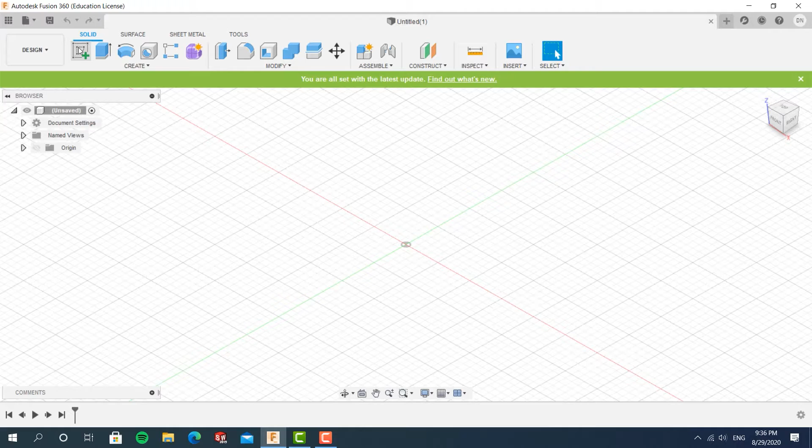Okay, so now let's get going with the tutorial part. For anything you want to CAD out, you want to first create a sketch. A sketch should be a 2D version of whatever you want to do. So let's start by creating a sketch using this tool right here, create sketch. For that, you would need to choose a plane to draw your shape on. Right now, let's choose this plane right here, which is the front plane.

When you're sketching, you have three basic types of functions. First is create. Basically, you create different shapes and things — this is the bread and butter of whatever sketching you need to do.

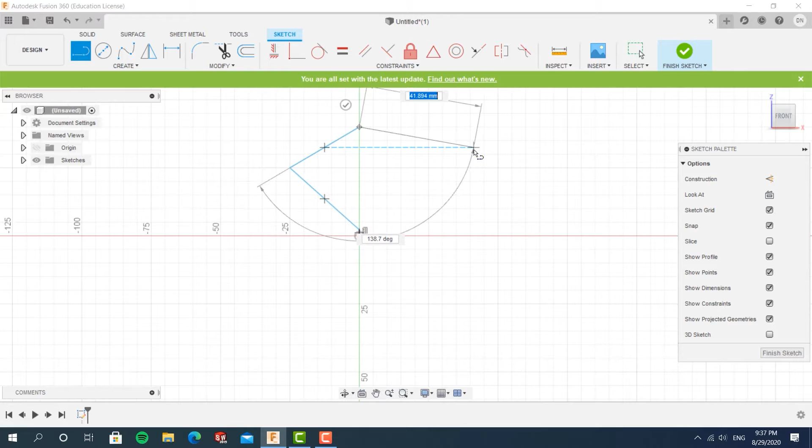You can add lines, the most basic shape. Like its name, it's just a line between two points. The first click decides where the line starts, the second click where it ends, and when you continue on, it continues from the end point of the previous line — your next click becomes the end point of the next line. If you want to exit this function, you can double click, click a point you already have on your sketch, or press escape.

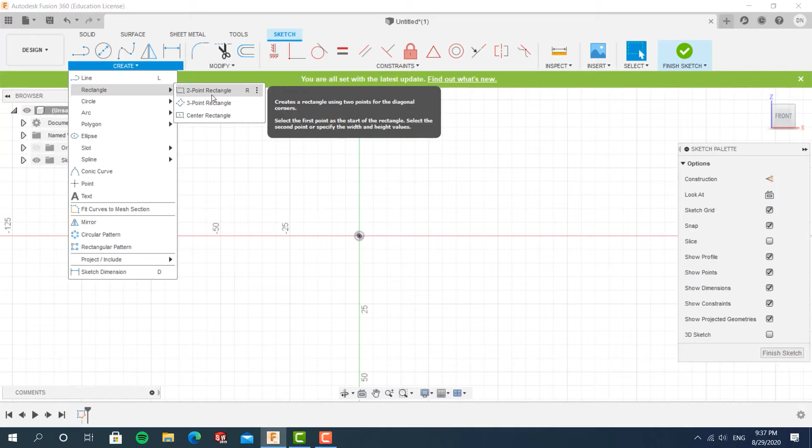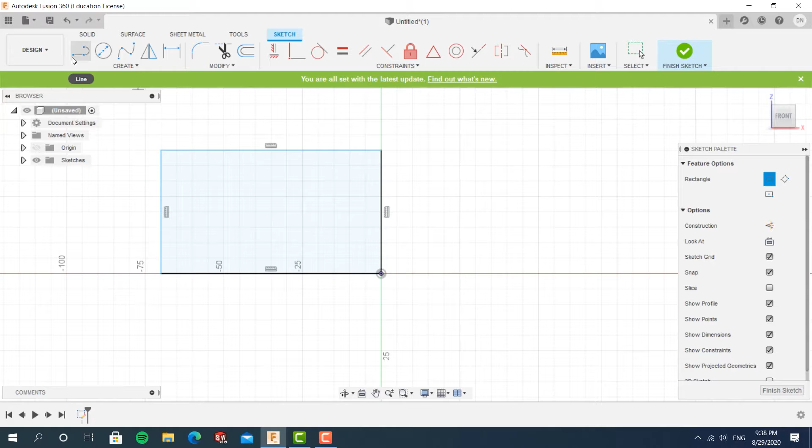Okay, so let's delete those. Other functions you have are creating rectangles — these are the different types you can use. The most simple one is the 2-point rectangle, where you create a rectangle out of 2 corners. The limitation of this one is it will mostly line up with the 2 axes. You cannot make a rectangle going this way — it's just not a thing you can do with the 2-point rectangle.

If you want to do that, you would need to use a 3-point rectangle, where you choose 3 different corners. Let's delete those and move on to the next one.

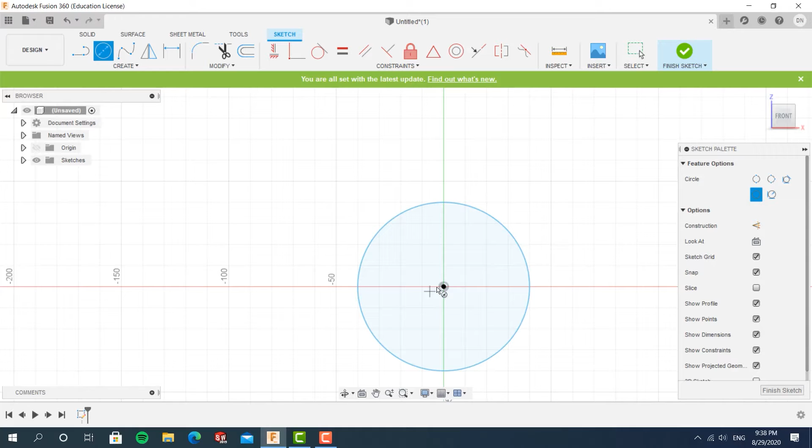The next tool is a circle. The first click is the center, the next click is one of the border points — basically you just draw the radius and it creates your circle. There are other ways to draw a circle, but that's the simplest way, and most likely you'll just use that one and add constraints later to limit it or set it where you want.

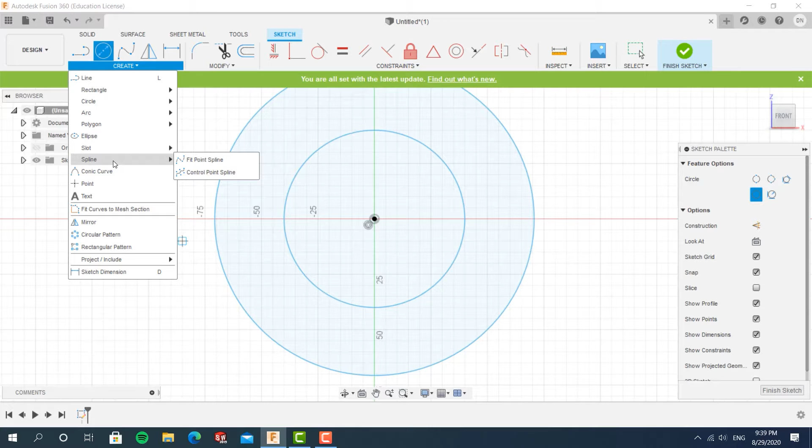You can create an arc, a polygon, slots — everything is very simple and bare bones, you read the name and basically get it. The things you most likely won't get right away are the spline and the dimension, so let's talk about those. But first, let's just delete this so we have a clear sketch.

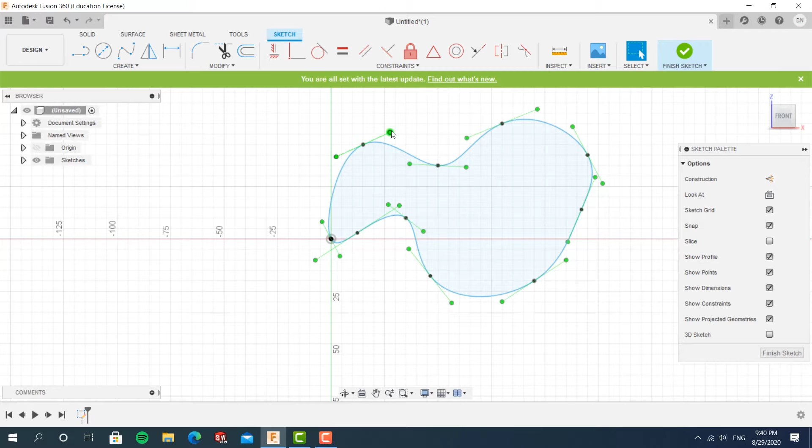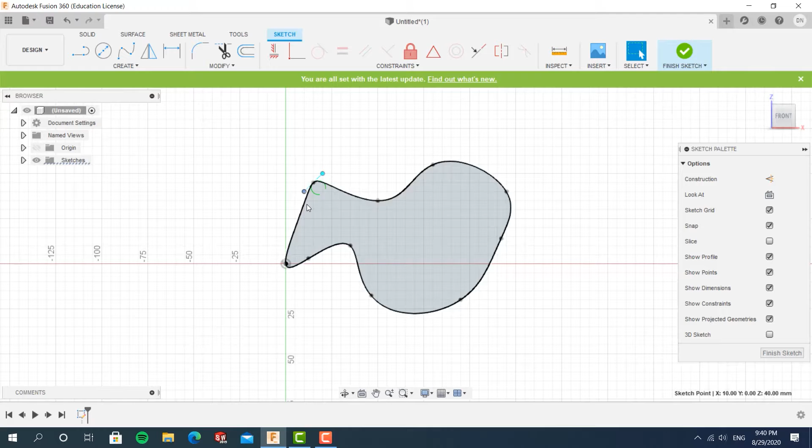A spline is basically a smooth curve that goes through all of the points you choose. Right here, it goes through all of those black points, and when you want to modify it, you can modify these green lines and points, called the spline handles. If the handle is longer, the curve follows it more closely; if shorter, it doesn't follow as much — you can modify those. This tool is very useful when you're making weird shapes, when you only have some constraints of the whole shape but you don't really know what the shape is like.

For example, if I want a smooth curve that goes through some points, I'll draw out a random shape — let's say this is a rock, and I want a smooth curve that just covers the whole rock. I can just choose all of these points, and I'll need to adjust the spline handles later on, but basically you can get a smooth curve that covers the whole thing.

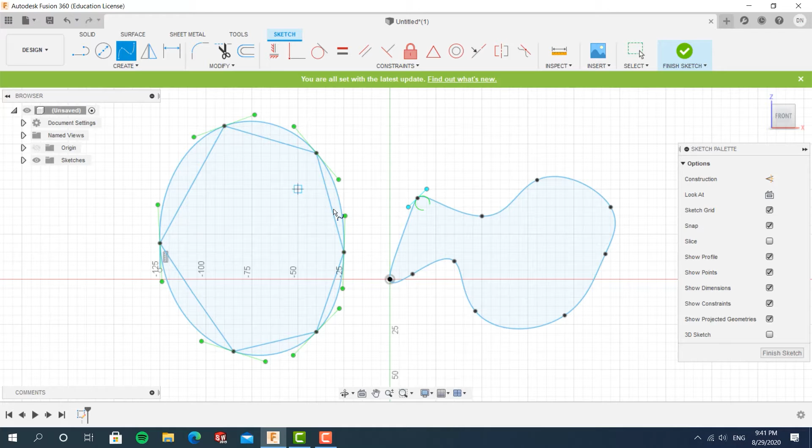It's very useful when you just have some constraints but you don't know the whole shape. Okay, so that's it for the spline. Really, for now, you don't really need to know much about it. It is not something that you would need to care about when you're just starting out. Let's just delete those off and get to the next thing.

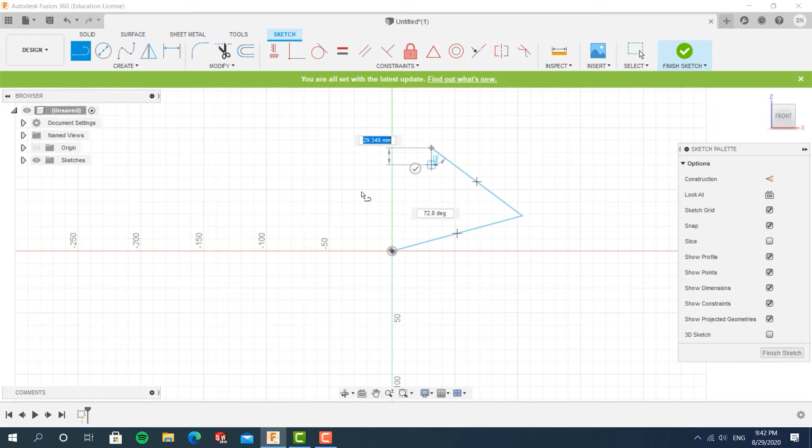The next function that you might be confused about is dimension. Dimension is basically adding size and constraints that are related to numbers about everything that you have here. Let's add some shapes, and now let's test the dimension function.

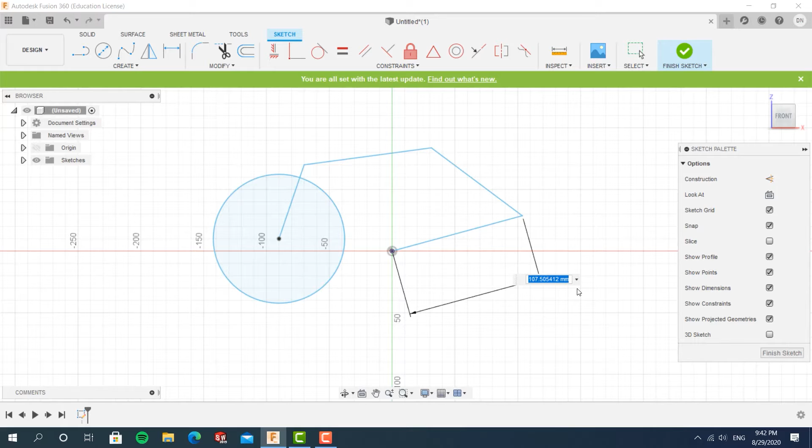The first thing that you can change by using the dimension function is the size of everything. You choose a line, you can choose the length, and you can change the length of the line. Let's say right now it's 107 millimeters. I can change it to 50, and you can see that it's shortened by more than half.

You can change the angle between two lines by pressing both of them. Right now it's 52. I can just type in 80 and it will turn into 80.

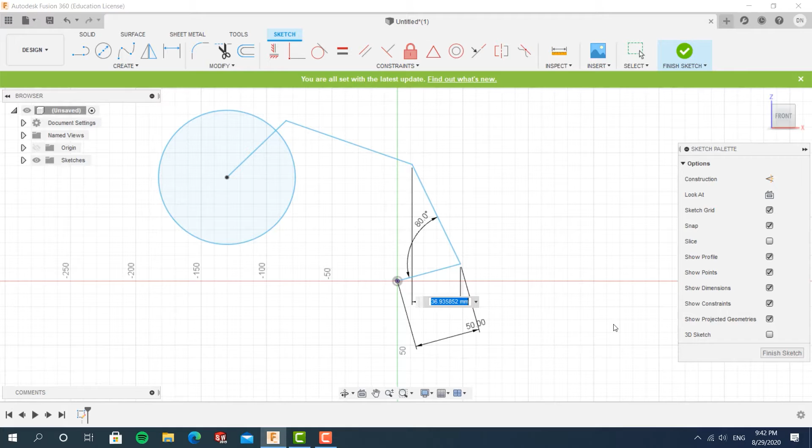You can change the length of it in a certain axis. So this is the length of it in the x-axis. I can change that to 40, for example.

I can change the diameter of a circle. Furthermore, I can change the distance between the center of circles and just generally between points. Let's put this as 200, for example.

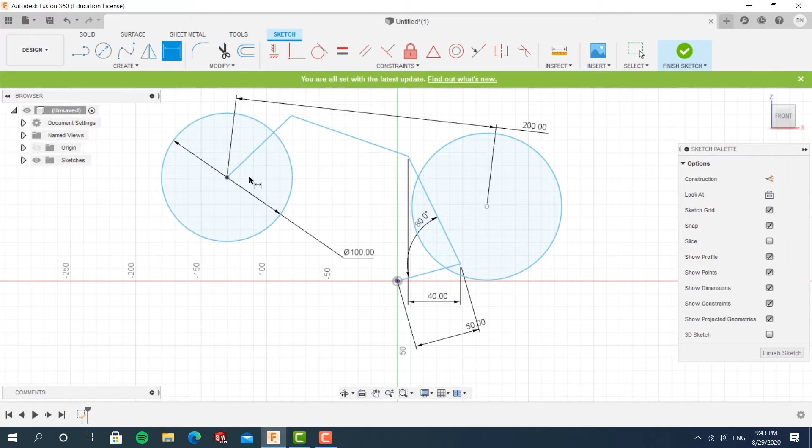Another thing that I would like to note about using dimension is that there's a thing called driven dimension. So, for example, if I choose this thing here, instead of clicking it immediately, I change this to driven. Now this will not change the actual length of this line, but the number will change accordingly when you change the length of this line. Basically, if you have a part that you don't know the size of, you can just add a driven dimension there and change every other thing, and then whatever you're left with is the number you need.

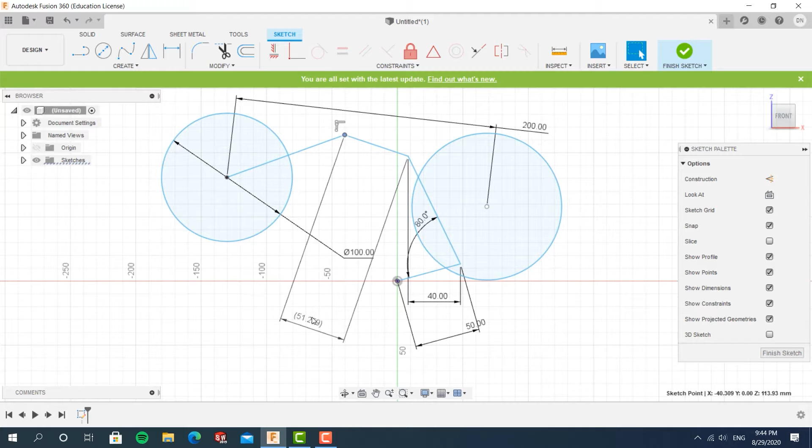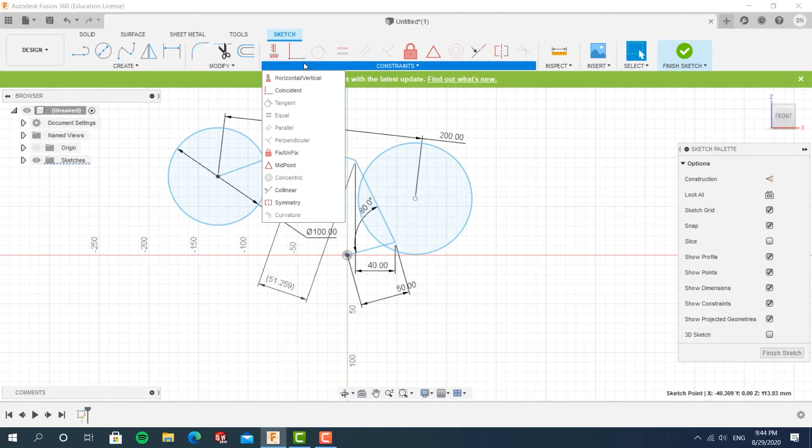Okay, then you can move on to the modify functions and the constraint functions. Constraint is basically adding relations to different objects that you have on your sketch. You can make two lines be parallel, make their lengths equal, make them perpendicular to each other. Basically, these things are very easy to understand. It's just relations between different lines, different circles, lines and circles of the objects. It's very simple.

Fillet is creating a round corner between your lines, and trimming, like its name, you just cut things out.

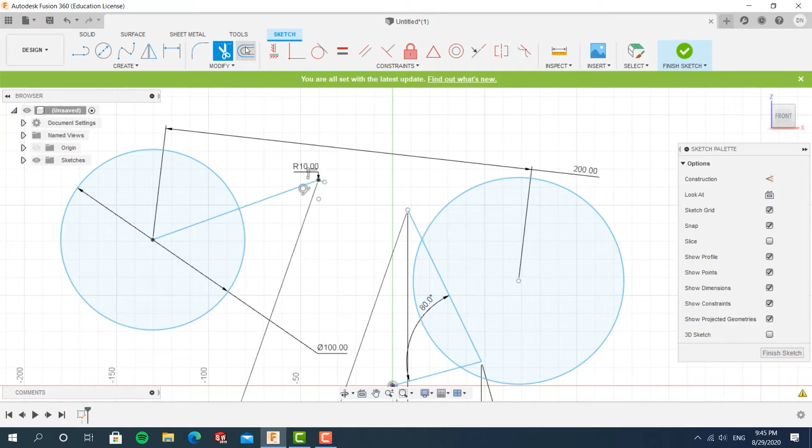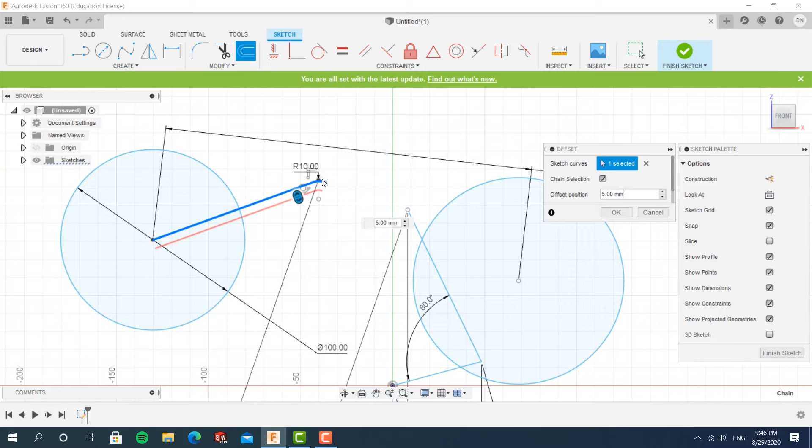Offset is, well, you make an offset of whatever you want. Like this here, basically it's copying this whole shape, pushing it perpendicular to whatever point it's copying. As its name suggests, it pushes every single point in the thing you're trying to offset in a direction that is perpendicular to the slope at that particular point. So everything in this line will be pushed in a direction that's perpendicular to the line. This curve right here is going to be pushed inward toward the center, that's why this curve is very small compared to this one. That's basically the gist for offsetting.

Okay, because I know that this will not help much by just talking about the tools, we will now try and make an actual thing. And in making an actual thing, I will show you functions that are there from a sketching function. Let's start that now.

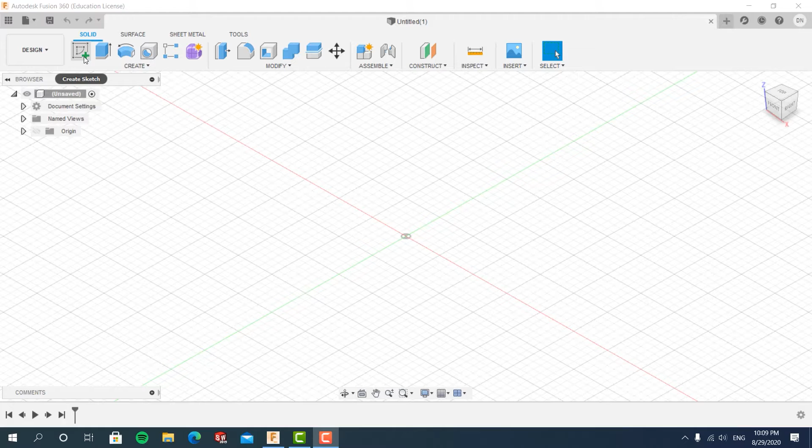Okay, so we're here in a new file to create an actual object for this tutorial. When I learned how to CAD, I was taught how to make a die. When I teach anyone to CAD, I teach them how to make a die. So that's going to be the same thing, we're going to make a die. First, like every single CAD file, you would need to start with a sketch. So a sketch of a die is of course going to be a square, because the die is going to be a cube.

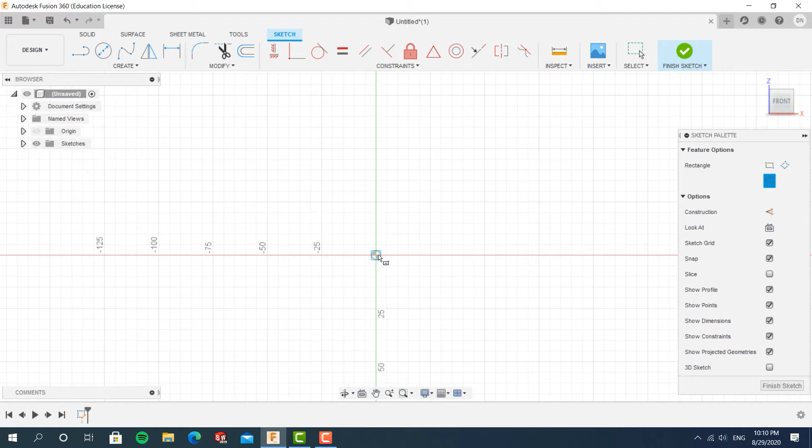So you center the rectangle, starting from the center of the whole file and stretch out. The first thing you would want to do is make these two equal, because you want a square, not a dumb rectangle. Then add in the dimension for a side to adjust the side of the die. So 50 is good enough.

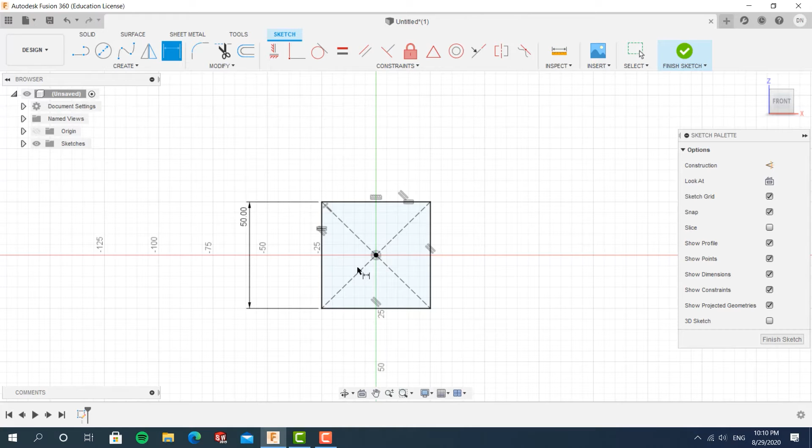After you have a 2D sketch, you then have to use one of these two functions to make it into a solid. Because it's going to be a cube, you want to push it up, so that's the extrude function, which just creates a solid object by pushing your sketch along a particular axis.

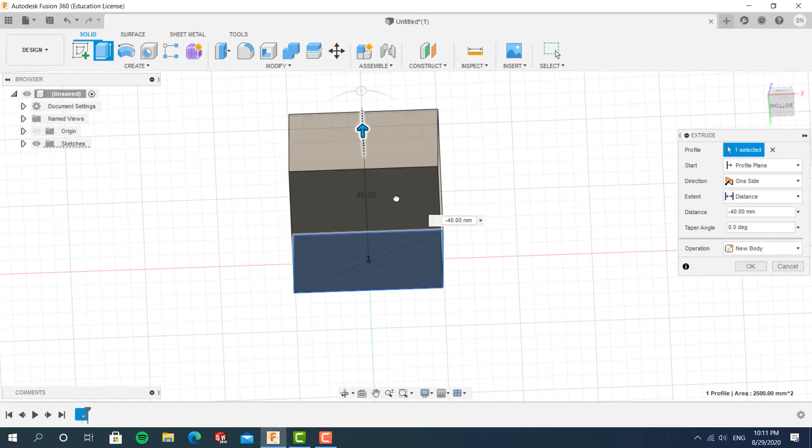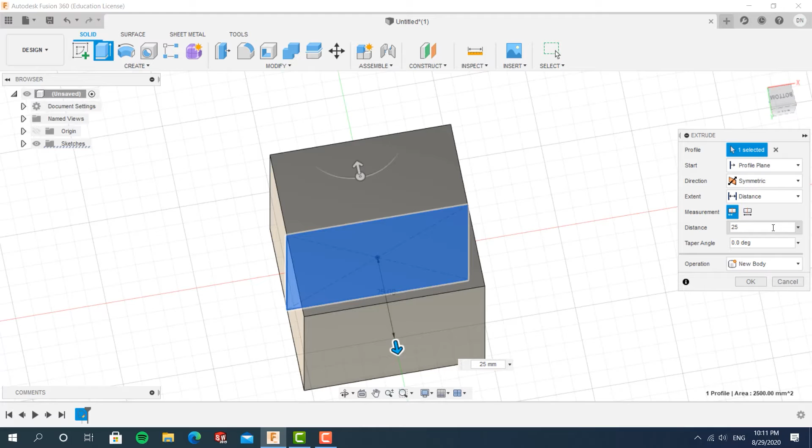Because we want the center to still be in the middle of the whole sketch, we don't want to push it only on one side. We want to push it on both sides for it to be symmetrical, so both sides should be 25, for the total length to be 50. So add in 25.

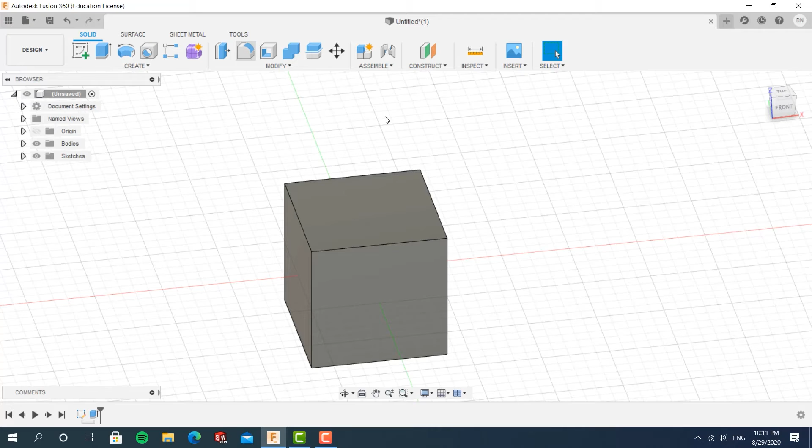So now you have this cube. The thing about a cube is that if you have the whole thing like this, it looks a bit silly. You never see a die that is a perfect cube because that just looks silly. So one of the things you can do is use this function over here.

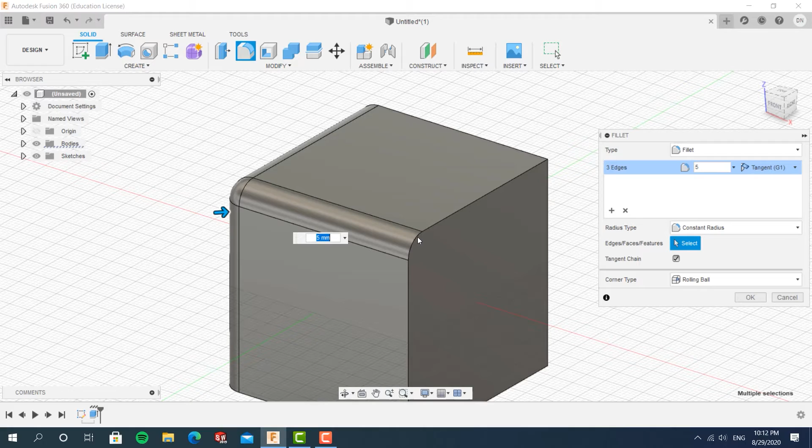Basically, this function is going to smooth all of the edges. Let's smooth down these three edges, for example. If I add a 5, it's going to smooth down so that this cut, the radius of it, is going to be 5.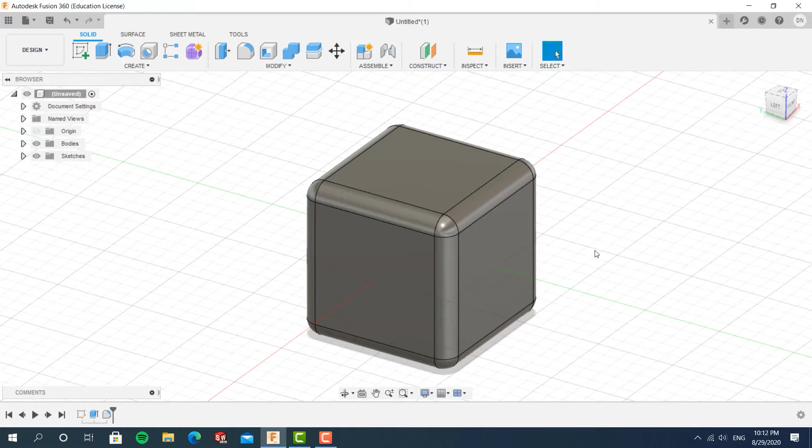We want to smooth out all of the edges, so remove the selection and select the whole thing. 5 seems good, so yeah, this immediately looks better, but we can still do a bit more. So let's delete the fillet function.

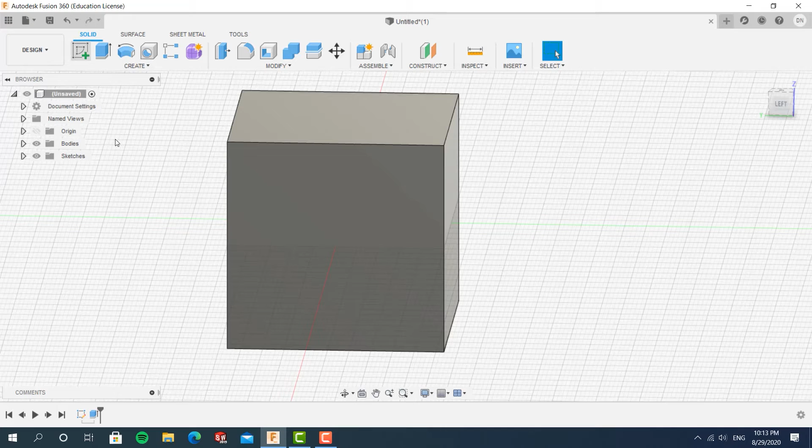This way to make a die look better is kind of like a trade secret for me. First you would need to draw a thing that's right in the middle. So let's choose a plane that's in the middle to draw a circle, and then just take out a big area around that.

So the thing you want for this is for the corner right here to be very small. So 64 - this now is 64. The corner still seems a bit too big, let's add some more to it. Let's say 67 - well, yeah, that looks good.

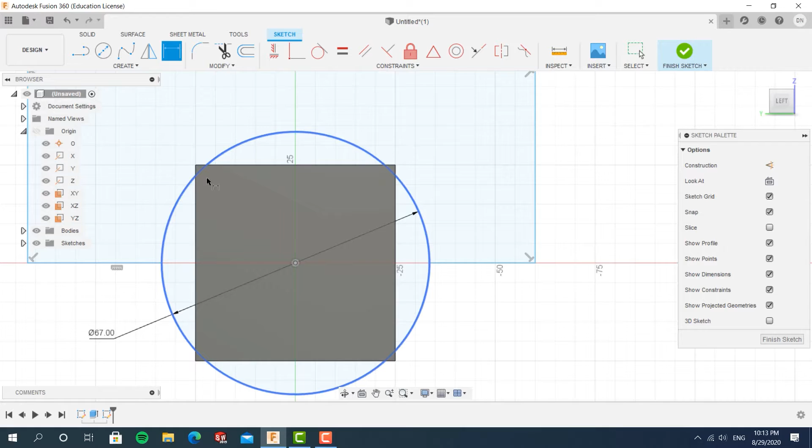Because you don't want to just extrude cut the whole thing out - if you extrude cut a cylinder out of here, you're just going to be left with these 4 awkward corners - you want to use a revolve cut instead.

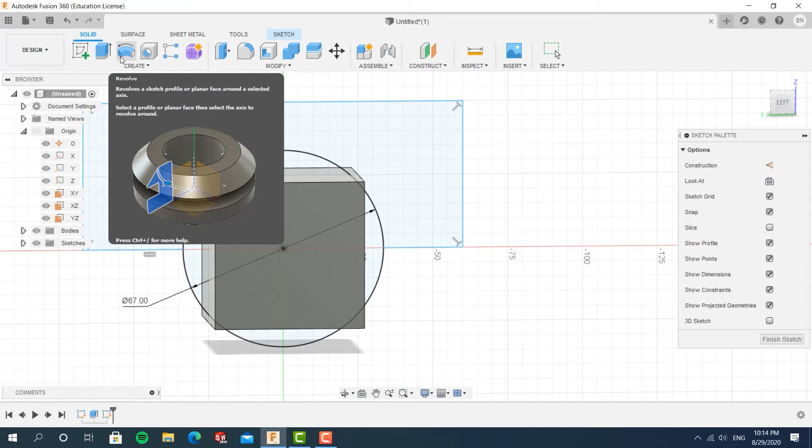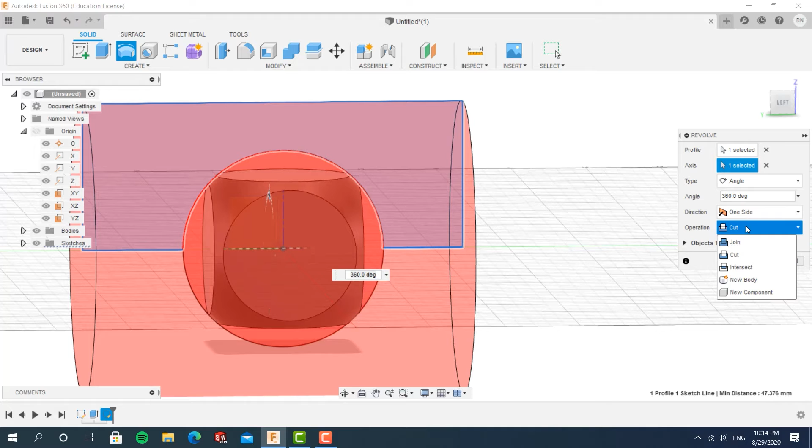This function is basically just spinning an area around an axis, after choosing to either add a new body or cut things out. So right now we want to choose this big area around here, use one of the axes, and change it to cut instead of new body. Yeah.

We just cut that out, and this looks pretty nice. It's kind of a mix between a cube and a sphere. It's kind of weird, but it looks good, so I guess that's why I like it.

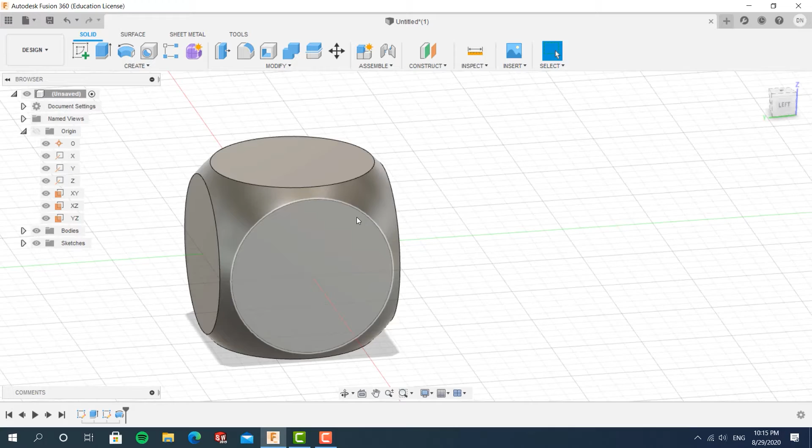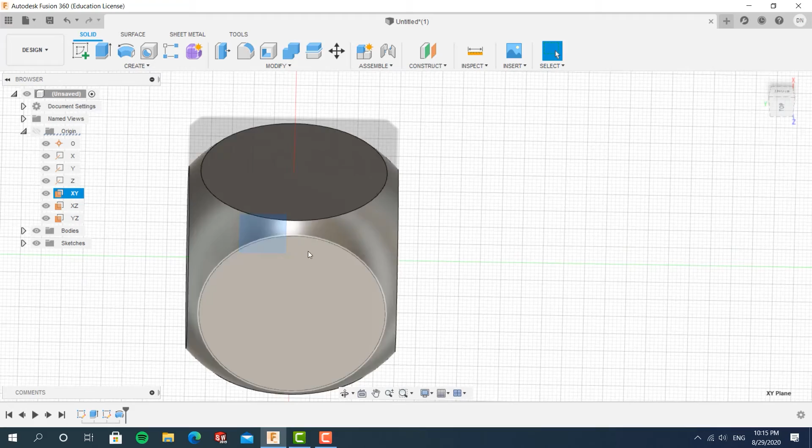So for the die, you would want to draw out the holes. For those of you who can't really remember the orientation of the holes in a die, just remember that two opposite sides will add up to 7. If this side is 6, this one is 1, this one is 2, that one is going to be 5, if this is 3, that one is going to be 4. So let's start.

We can make the hole in a myriad of ways. The first way is to just draw a circle and do something similar to what we did to create this nice shape for the die - just revolve cut it around. If you make the center of the circle straight in the middle, that would look really weird, as the hole would be way too small but way too deep.

So you want to offset it a bit up. Generally, what I found to look pretty nice is if you make the distance between the center of the circle and the face to be 1/3 of the diameter of the circle. So if I put this as 9, then the distance from here to here should be 3.

So this small area over here is going to be the cross section of the thing you're going to cut out. Again, use the revolve cut function, choose this area over here, and choose this axis to cut out the whole thing.

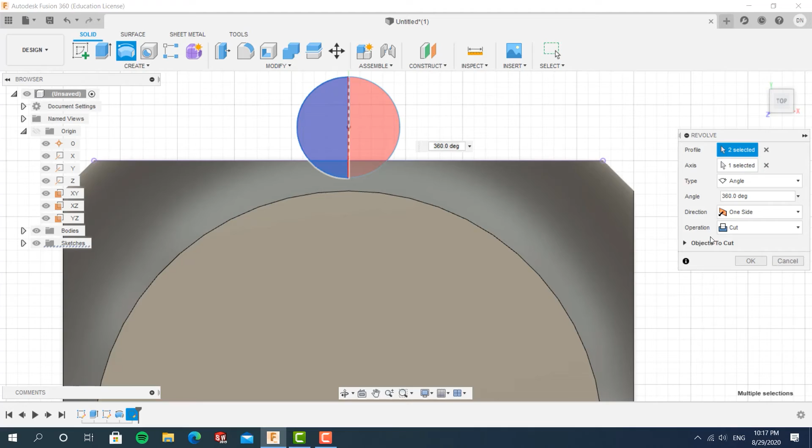Also, you cannot choose areas on both sides of the axis, because that will cause errors in the system - only choose areas on one side of the axis. Cut that out and we have this nice hole up here. Let's continue with the other ones.

So the next one I want to draw is the 3 hole, because that's another simple one since it has a hole right in the middle. Draw a circle, draw some lines to separate it in 2 halves, which will also be the axis for your revolve cut. Because this is the 3 and not the 1, it should be a bit smaller. The previous one was 9, so let's put this as 6. This is 1/3 of it, so it's going to be 2.

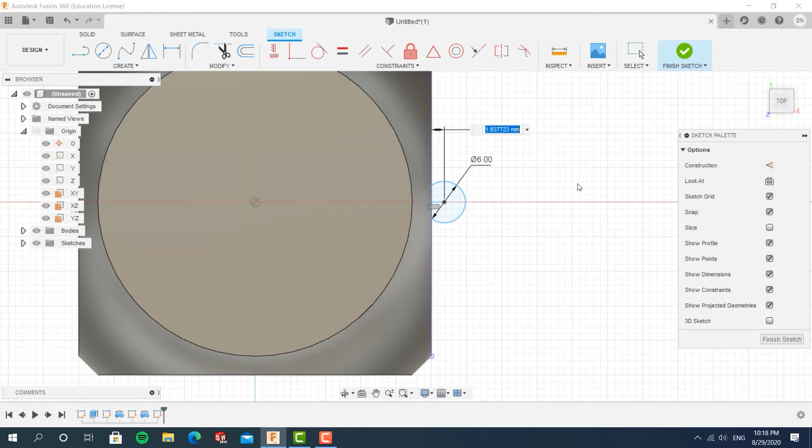And then we can cut it out. Again, revolve cut, choose this one, choose the axis, cut. Okay, we have a smaller hole over here.

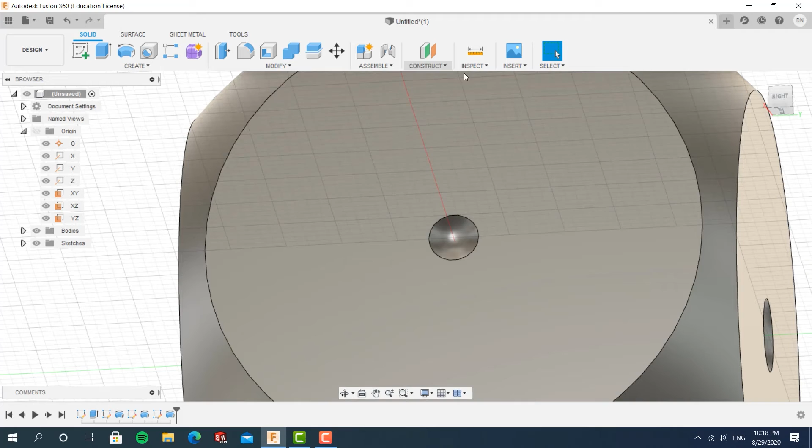Now, because we don't want to draw 2 circles over here, we'd need to make an extra plane and do a lot of stuff, which would take a lot of time. We don't want to do that because everyone is lazy and should do things as efficiently as possible. We're not going to draw new circles and cut new holes - we're going to use a pattern. Basically, to use a pattern, you copy whatever body or feature as the thing we're about to do. We're going to copy the revolve cut feature right here and copy it in a particular direction.

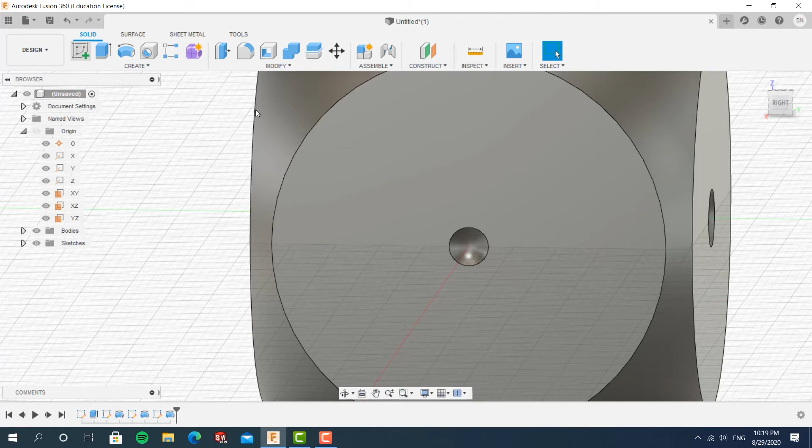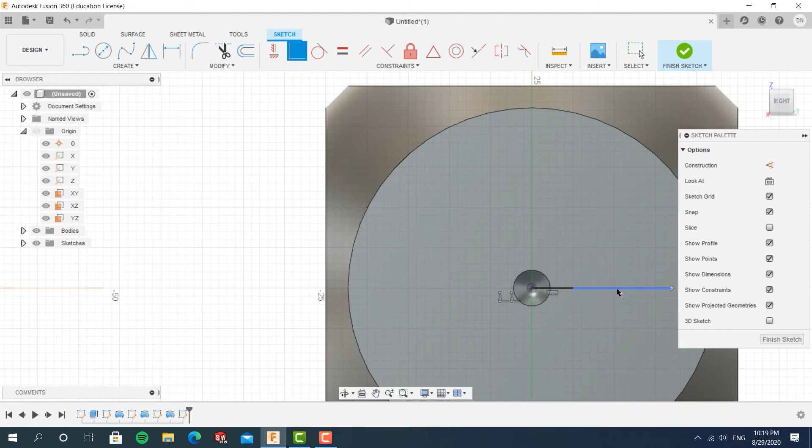For the 3, we're going to copy it diagonally, so we need a reference for it to go diagonally. Let's draw that reference now. First, draw a line, then actually we need to draw 2 lines. Let's make this construction, and add another line - that's more simple. Now dimension it, make the angle between these two be 45. So that's going to be our reference.

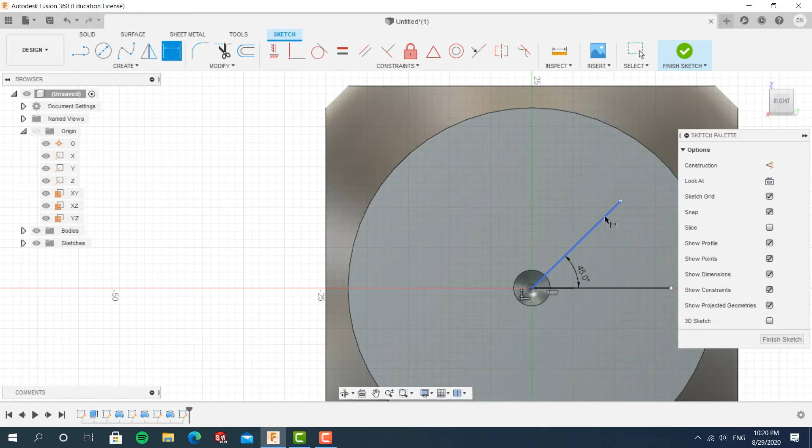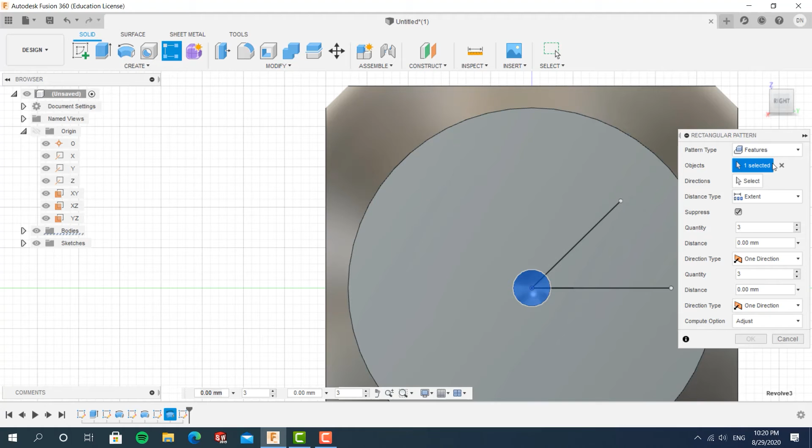Now finish this sketch and move on to this thing. The pattern type is not going to be faces because the thing we're copying is a revolved cut, which is a feature. So copy this feature. The direction we're going to copy it along is this axis. It's a 3, so we need to cut it on both sides - symmetrical. Let's check, and change the numbers to see what looks nice.

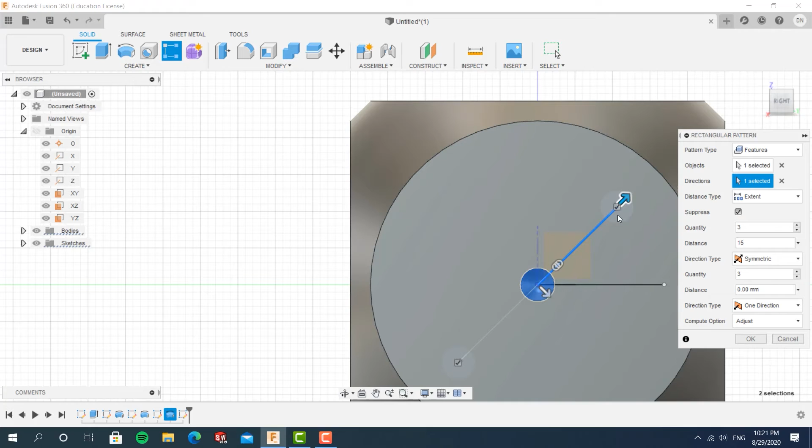Okay, 15. You can see the 3 holes over here. That's good enough. If you want it to look better, you can hide your sketch. Where is it? Yeah, here it is - you can hide it.

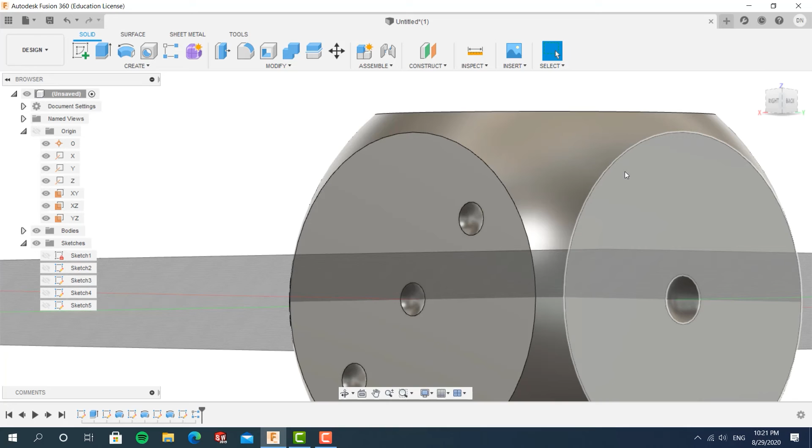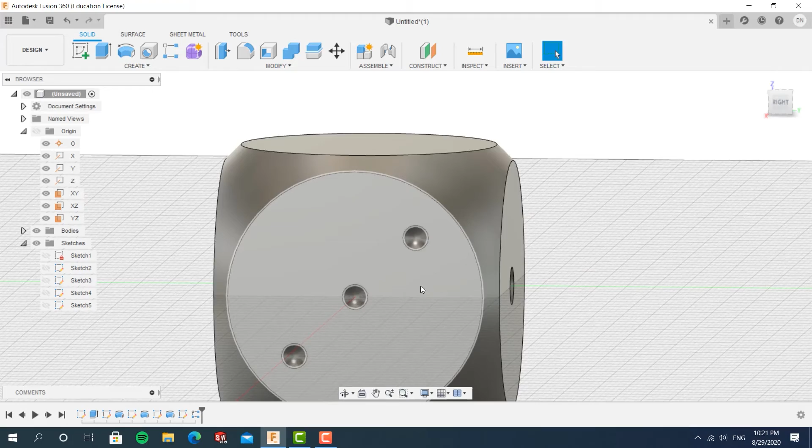Now we can move on to the 2 hole. Basically the 2 hole is just the 2 holes on the side of the 3, so we can just copy this and move it to another face. We're not going to use a rectangular pattern because that one doesn't change - it just pushes it up somewhere, and we can't push it down this way because we also need to spin it so that it's on this face instead of this one. So what we're going to use is the circular pattern.

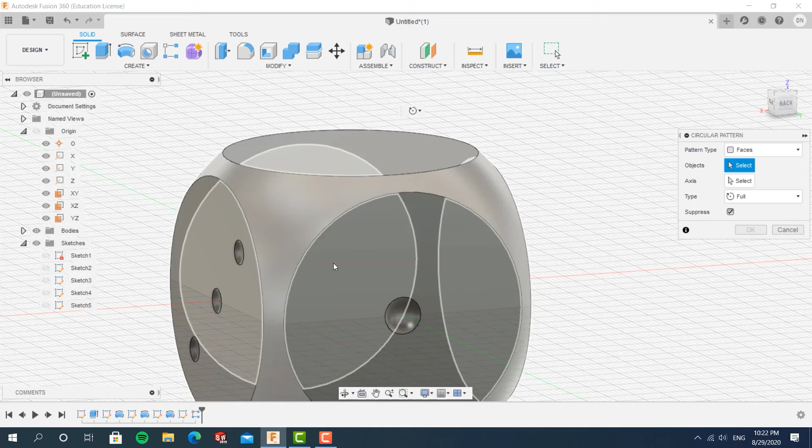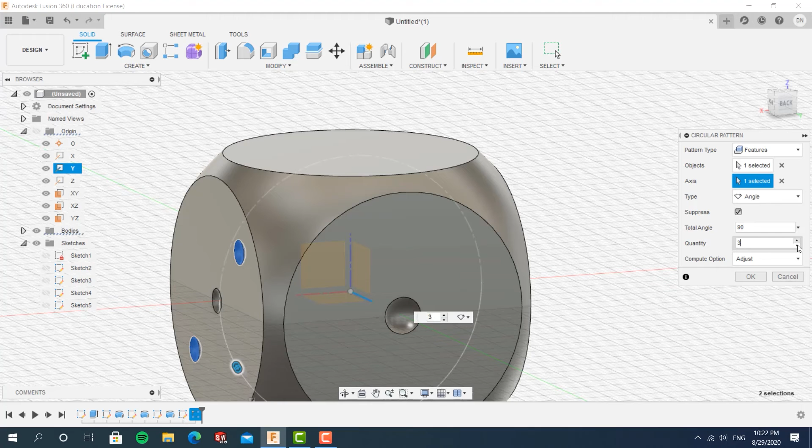What we're copying is a feature, particularly the rectangular pattern, and the axis we're spinning along is the y-axis. We don't want it to go a full circle, just 90 degrees, and we just want to copy. As you can see, we cut 2 holes over here. If you want, you can make a separate one so the 2 holes are closer to each other, but for this example of a die, I think this one is fine.

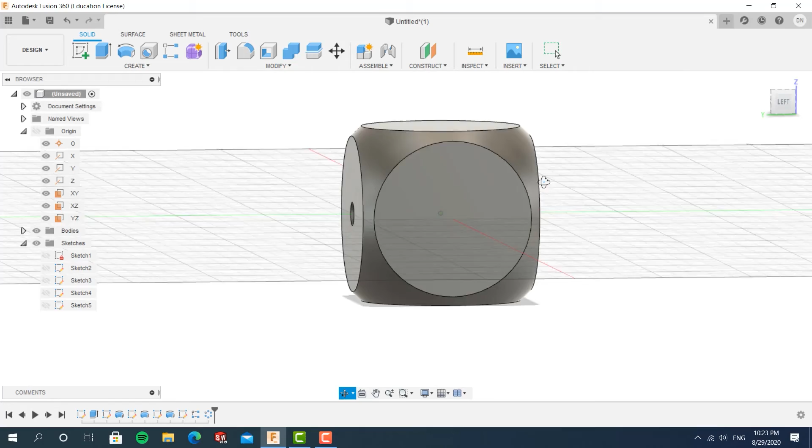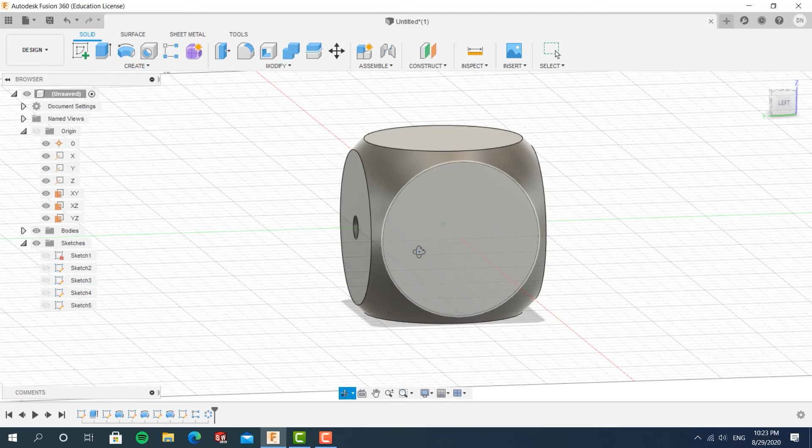So the next one we're going to make is number 4, which is going to be on this side because 3 and 4 add up to 7. The 4 hole doesn't have any hole in the middle, so we can't do what we did for the other one. We need to make an extra plane because we want to draw it so the hole is over here - on a surface that's a bit up from the surface we have right here that goes straight through the middle.

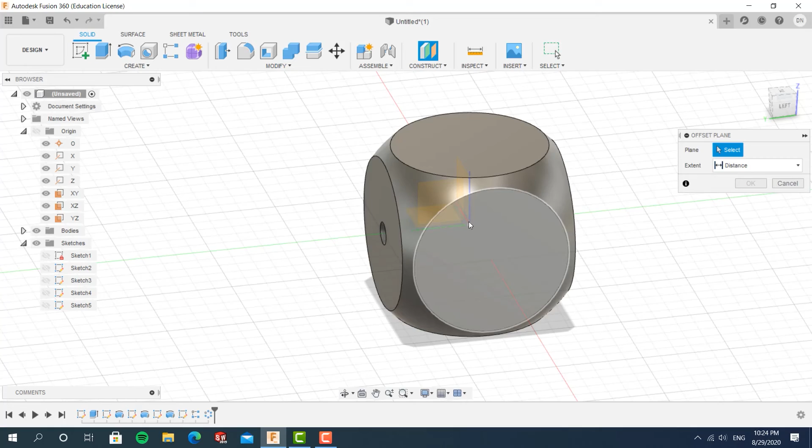So what we can do is use this function, offset plane. It creates a plane that is a particular distance away from what you choose. For now we want it to be a bit up from the x and y plane. The distance between the holes is going to be 15, so the distance from the middle is going to be 7.5.

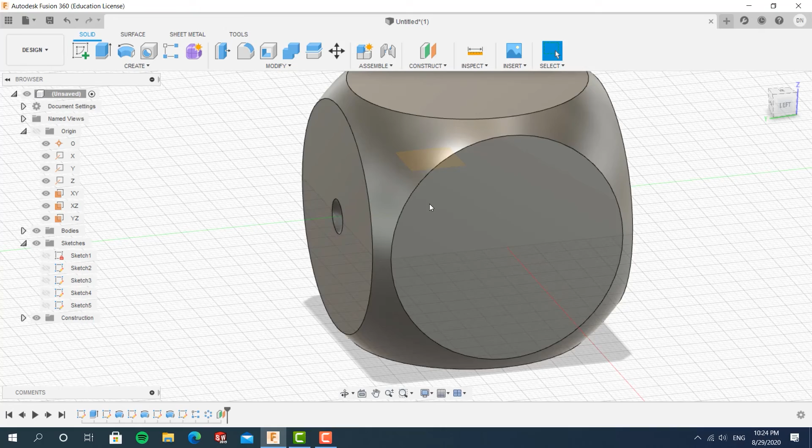So we have this surface right here. Let's choose that one and create a sketch on it. It's going to be on this side up here. Again, the procedure for creating the hole is the same thing. Add some dimension, 6.

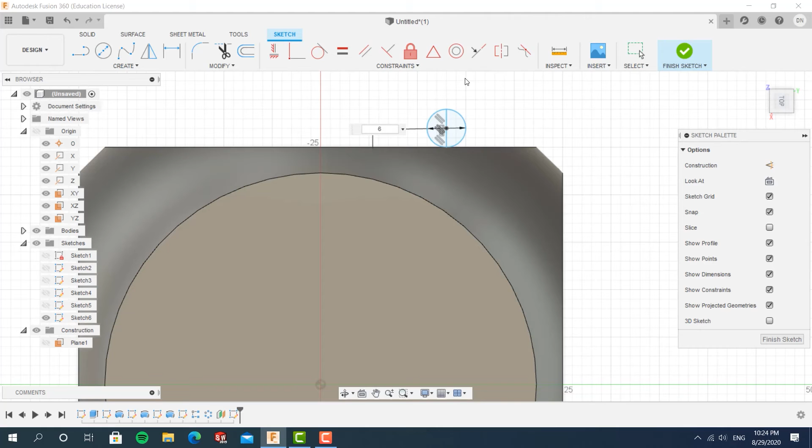Okay, so again, revolve cut to cut out the hole that we need. Now we need to copy it, so we have 4 holes.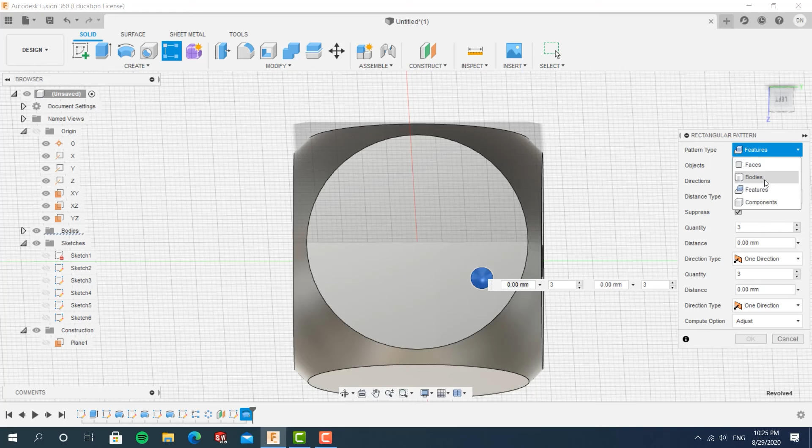Again, what we're going to use is the rectangular pattern. Copy the feature and not the body itself. Let's take for example, if we choose the body, click in the hole, we're just going to copy this whole big die, and we don't want that to happen. So, feature.

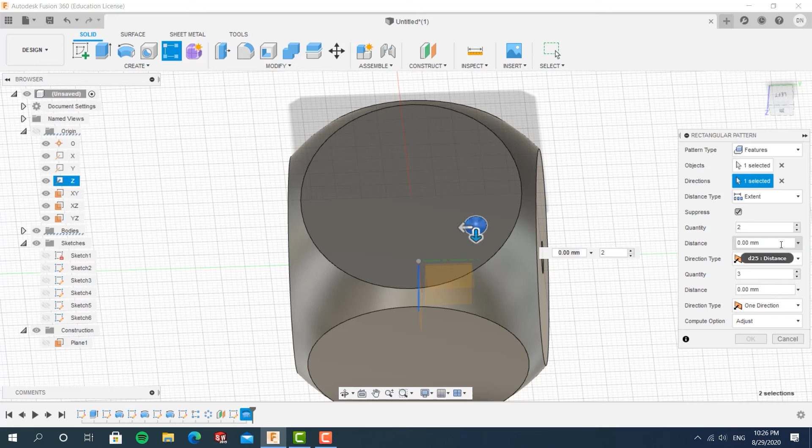Direction, we want it to be along this and this axis, so Z and Y. Yeah, it's set for me already. So let's change, let's take 15.

Okay, we can see that it pushed up here, so we want it to go the other way. So let's add minus 15. This one over here should also be 15.

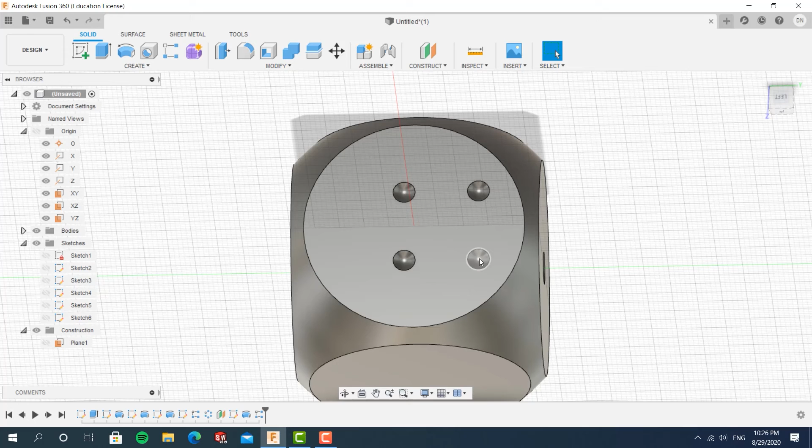Okay, we can clearly see that I messed up and did not put this in the place that it's supposed to be. Let me change that a bit. So just roll back to the sketch. You can edit it by choosing edit sketch right here.

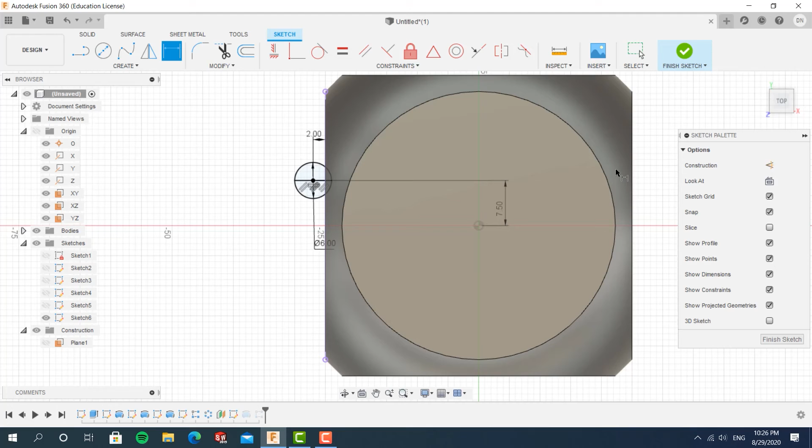We want it to be 7.5 on the center because it's half of 15. Okay, finish. Yeah, okay.

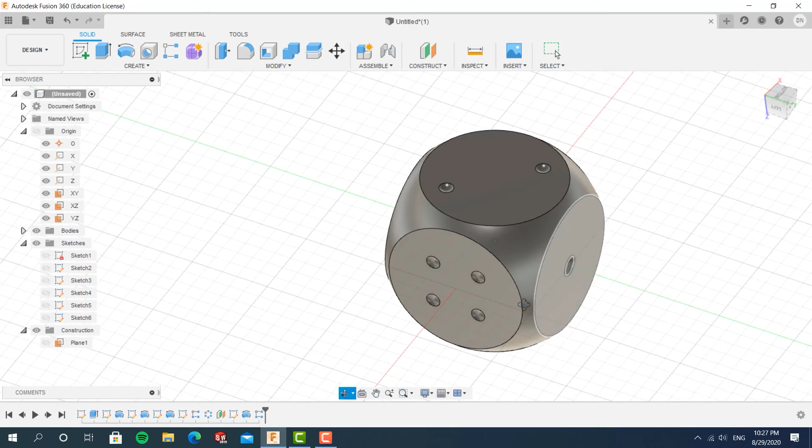If you feel like this looks a bit too close to each other and too clumped up, another thing you can choose to do is instead make the distance between the diagonal tiny or bigger, or just change up the number a bit. But for now, this would work.

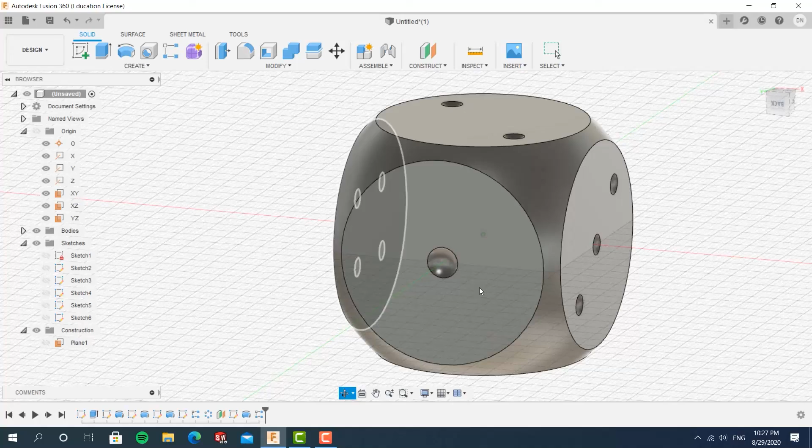So another simple one to do is going to be the 5, because the 5 is just the 4 with something in the middle. So again, like what we did with the 2 and 3, we can copy these two features and do a circular pattern to get it to this face that is opposite of the 2.

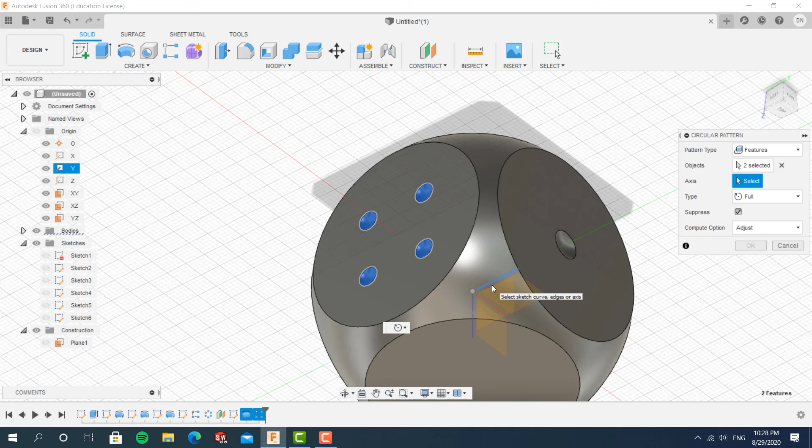Axis, you can see here and the top, we want to spin it around this axis, so that's why we just want to go 90 degrees. Just want one copy, so okay, and yeah, we copy those over.

We can probably copy the middle hole from the 3 to be over that way also. So again, we can take, so it was this feature. Use the circular pattern and copy it up there.

So it's again going to be the Y-axis that we're going to spin it. Yeah, we're going to use the Y-axis. Okay, so 90 is the other way around, so let's just do minus 90, one copy only.

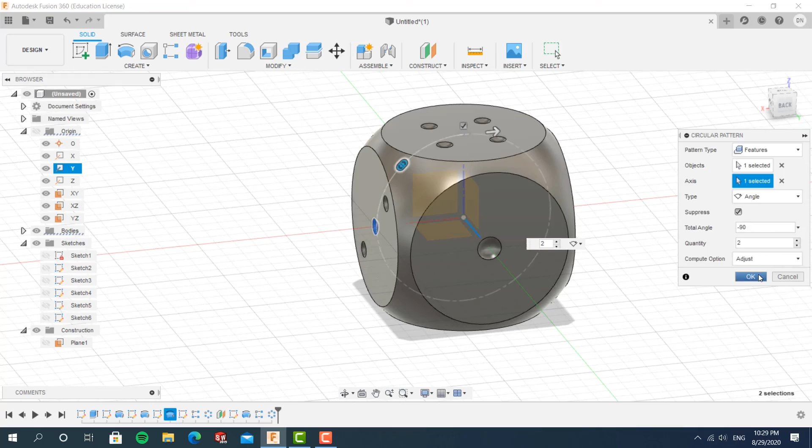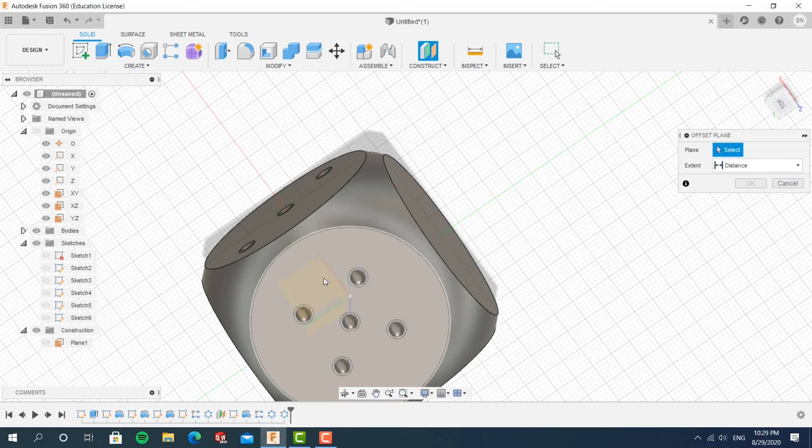Finally, we have the 6, and that is going to be basically the same thing with what we did for the 4. Offset a plane, this time just offset it with this plane here, the XY plane.

I'm just going to speed through this because you've seen plenty of times where I draw these things. So 6 and 2.

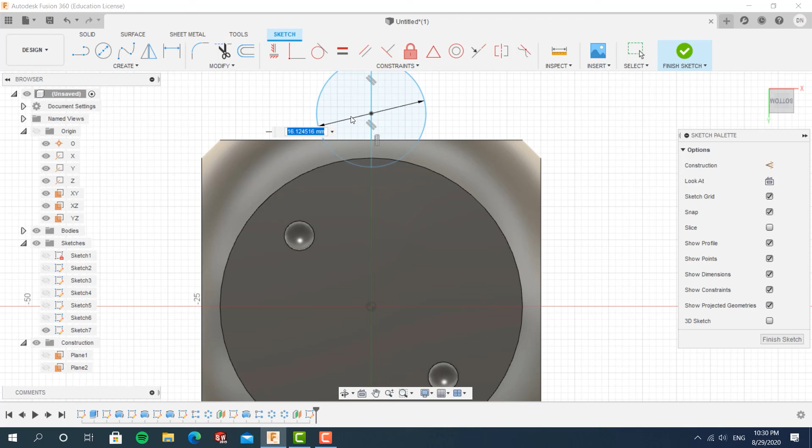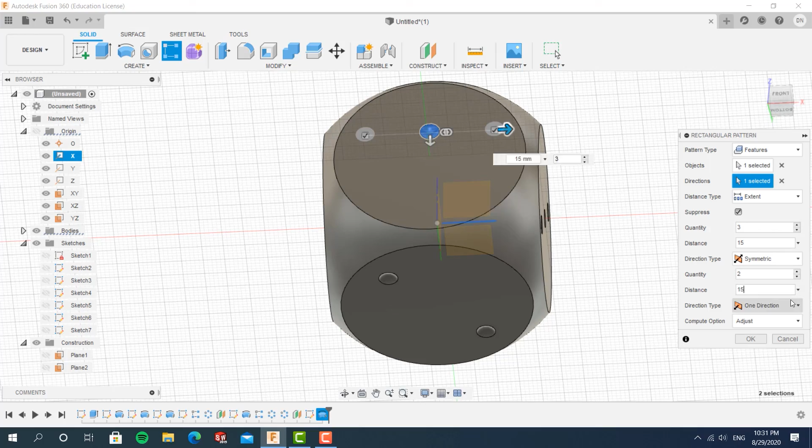Because we don't want it to just push this way, we want it to also push the other way, so let's again choose symmetrical. We want this to be 15. The other one, we just want one copy, and it should be 15 also. Yeah, okay, those look nice.

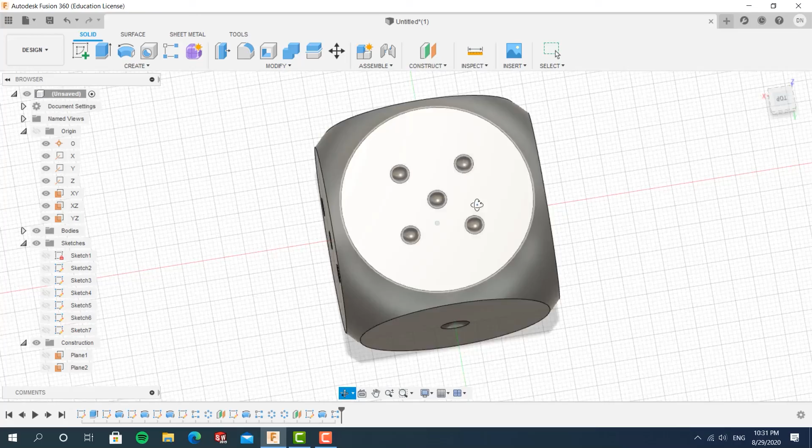Okay, so that's it. Now we have a die. That's the basics of CADing. By making this die, you learn how to use extrude, revolve, how to sketch things out, how to use the pattern, and how to construct planes and other stuff. That's mostly the basic things you would need to CAD to just start out with your CADing journey.